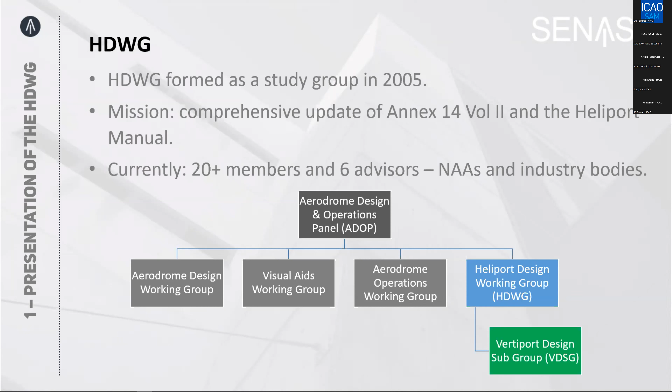How do the task forces in ICAO work within the aerodrome panel? The HDWG works based on a job card approved by the Air Navigation Commission. It was initially published on June 17, 2015, 10 years after creating the working group, and the approval of the last change was in October 2018.

That particular job card approved by the Air Navigation Commission for the work done by the HDWG is 95% complete. Since it was created in 2015, it has significantly evolved as it was further studied and improved. The evolutions have basically meant adding new work package items that were thought of, and some work packages have been delayed because of the COVID-19 pandemic, and in some cases because modifications or amendments of different annexes coincided with that timing. Whenever there's a modification in the Heliport manual, we also need to make changes to this annex.

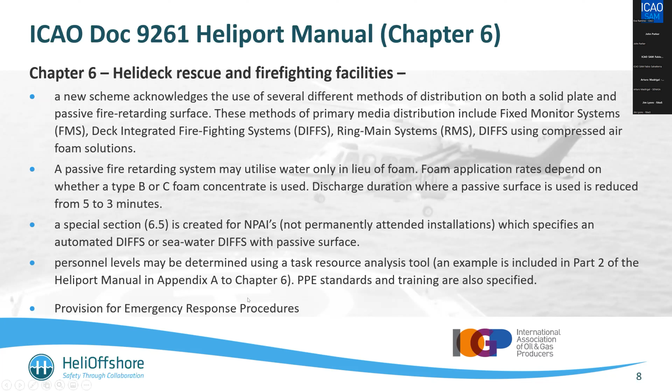Chapter 7 covers winching areas to ships, and there is guidance on the location, any physical characteristics, and specifically any obstacle protection. It includes marking of the winching area and lighting, particularly for use during night or hoist operations.

Chapter 8 covers anything in the miscellaneous bracket. This has been introduced for the first time, mainly because a lot of the larger offshore installations nowadays have criteria for parking areas and for push-in areas to allow a second helicopter to land, for example, offshore.

It also covers weather equipment and basic guidance on helideck motion and the reporting and recording of this. In addition, we include communications and navigation equipment, helicopter refueling operations, and again bird control, which, although part of the main helideck, is also a specific issue when we come to those normally unattended, unmanned installations.

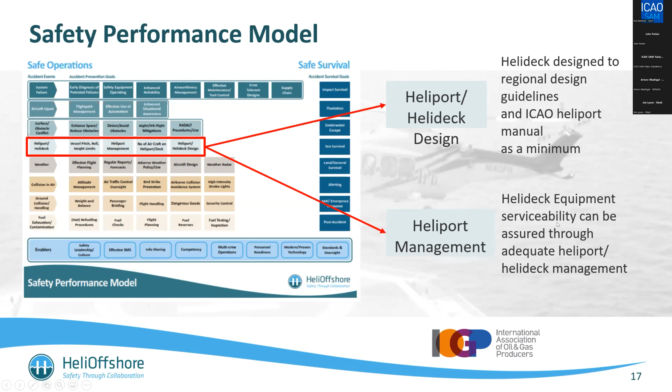This is highlighted through the Heli Offshore Safety Performance Model, which shows where we have helideck and heliport design, covering things like pitch, roll and heave for vessels, heliport management itself, the number of aircraft that can be on the helideck, etc. Really, the focus there is maintaining the original design as a minimum, making sure the helideck equipment is maintained serviceable throughout the period of its life.

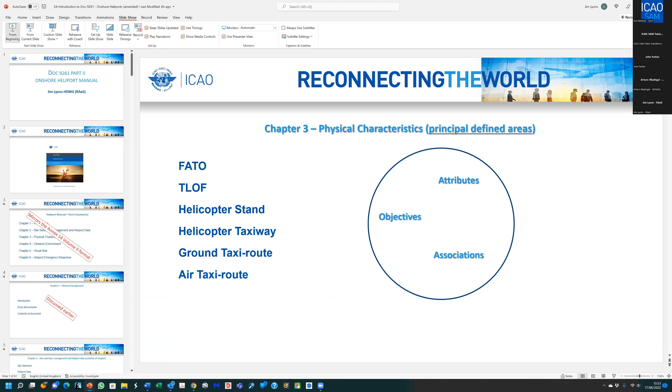For some reason or other, I can't find my presentation, even though I've got it on my screen. I might just have to share my screen. Okay. Can you see my screen? Yes, it's showing right now. Okay, but the whole, there you go. Now I see the PowerPoint. There you go, you're all set.

Okay, what I'm going to do now is I'm going to try and speak slower, otherwise I'll get a slap on the wrist from the interpreter again. What I'm trying to do is give you a quick gallop through part 2, which is the onshore heliport manual. Now you've got to understand that John represents an organization that not only owns all the helidecks but contracts all the flying to them, so it's not easy, but they've got good control of what goes on.

Now, unlike offshore, onshore heliports are not the same. There's a proliferation, there are thousands worldwide, and there is very little control. The Annex 14 provides some control, and with the certification and the SMS systems that Arturo talked about, that control will improve as well. So I don't expect anybody to remember the slides, but every slide that I have here represents something that's in the manual.

So if you open the manual, you should be reminded of what you're seeing in the presentation. It's Doc 9261, the 5th edition, part 2. The Heliport manual contents mirror exactly the contents of the Annex 14 Volume 2 format, so each chapter mirrors the chapters of the Annex. Chapter 1 we've already talked about earlier - RC and myself covered the introduction, scope, and the contents of the document.

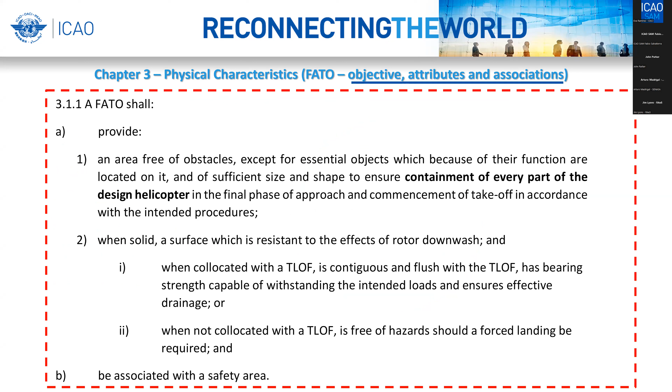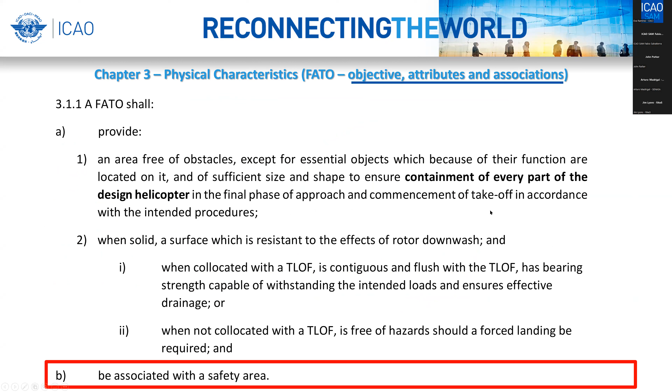So here's an example. This comes from Annex 14, Volume 2, and it's the text that contains the objective. The whole of this is the objective. Then you have the attributes - this one's containment, this one's the surface conditions. And lastly, you have the associations. Each of the defined areas will have something very similar to this inside the annex.

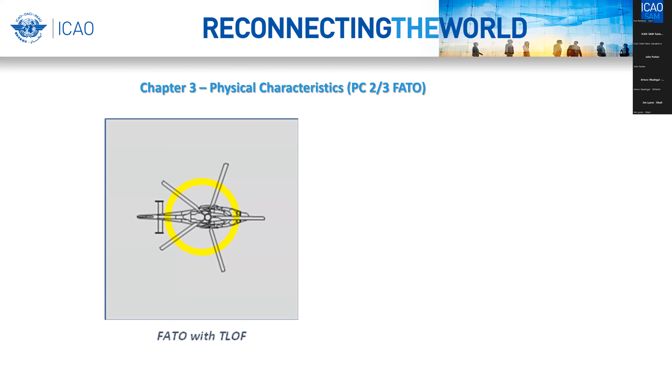So let's look at some of the things that are inside the manual. I have to say there are 150 figures in the manual and something like 20 to 30 tables, so it's a visual document. When we were producing the manual, what we tried to do is produce a pictorial description for everything we were describing in the narrative.

So here we have a FATO with a TLOF. Here we have a FATO with an aiming point. Now, I've already seen some of the other presentations, and I know that it is not a standard worldwide that the touchdown positioning circle, which is this yellow circle, part of the touchdown positioning markers, is contained on a lot of heliports. They have this triangle. In the annex and in the manual, that triangle represents an aiming point, and that FATO is not intended for landing. Only this FATO is intended for landing.

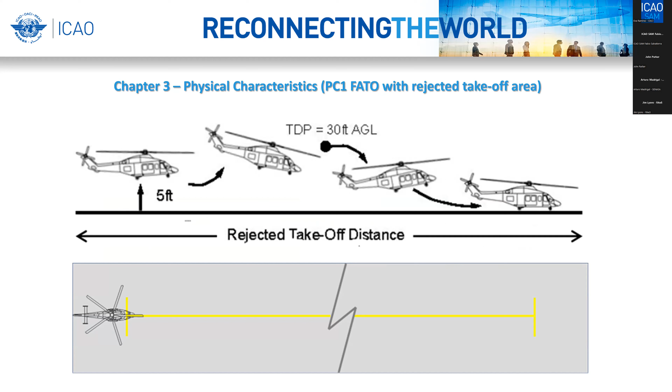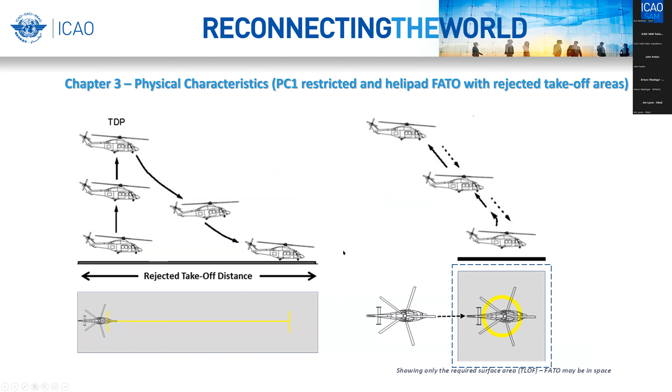The minimum FATO size is 1.5 design D, and I'll talk a little bit more about design D a little bit later. Here we have a PC1 FATO with a rejected takeoff area, and two more PC1 restricted or short field helipad. Now, with respect to this one here, the FATO does not have to have a surface. In the annex now, the FATO is an area which has an attribute of containment and doesn't necessarily have to have a surface. So if this was an elevated heliport, this dotted area would be in space.

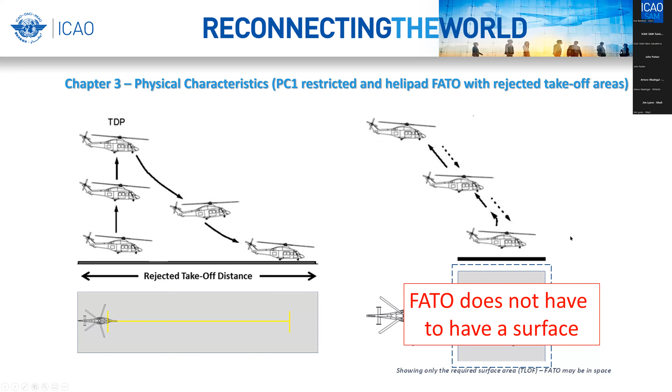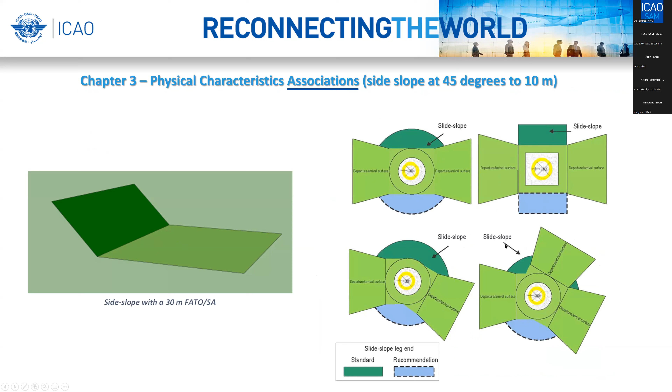Some of the associations - one of the associations is a side slope. So each heliport should have a side slope, which is at 45 degrees to 10 meters. Here inside we have pictorials of how those side slopes should appear for various configurations of heliports and their takeoff approach surfaces. The dark green is the standard and the blue is a recommendation. So it's recommended that we have them on both sides, but the standard is having them on one.

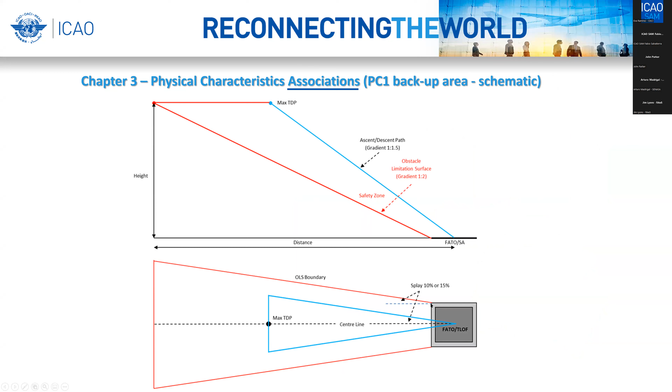Another physical association is a PC1 backup area. So if a PC1 helicopter is doing a backup procedure for a short field procedure or any vertical procedure, these are the elements that we expect to see in the backup area. It's an ascent-descent gradient. There's an obstacle limitation surface, and one emanates from the center and the other one emanates from the safety area. The 3D representation of that is as follows: the blue area is the ascent-descent surface. The helicopter goes up there and comes down there. Here we have two helicopters represented as their D values at their TDPs, and down here we have the FATO and the safety area.

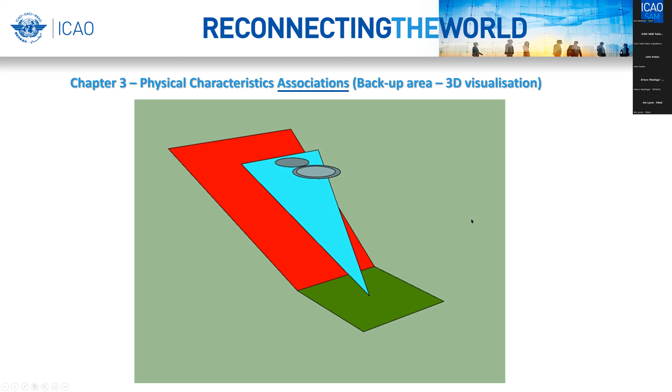Taxiways and taxi routes have attributes of containment for the wheels and surface loading. Taxi route attributes are containment, but it doesn't have a surface loading requirement. Here we have a taxiway with a ground taxi route, which is 1.5 times the largest overall width, and a taxiway, which is 2 undercarriage widths.

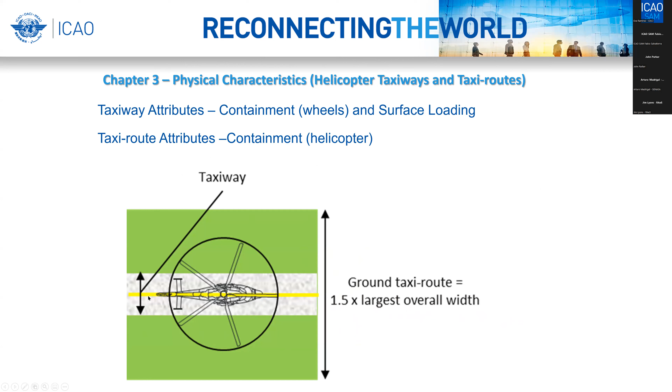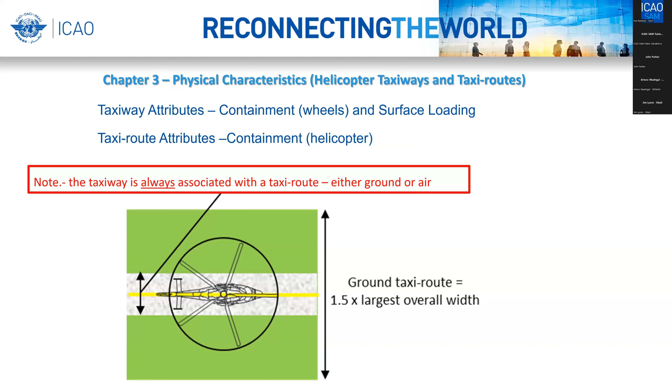The taxiway is always associated with a taxi route, either ground or air. You can't have a taxiway without a taxi route. On the other hand, you can have an air taxi route without a taxiway. So here we have an air taxi route with a taxiway, and this one you don't have a taxiway at all.

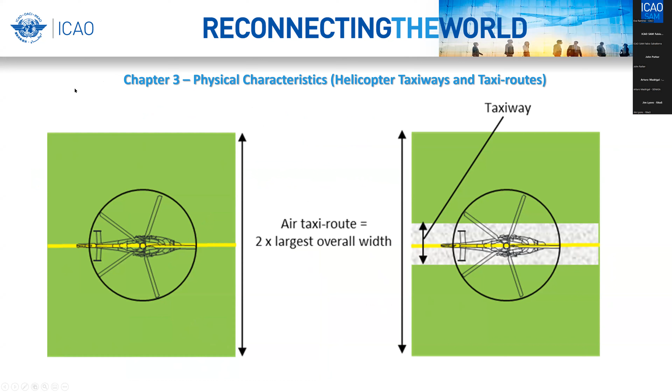Okay, so moving on to stand. The stand attribute is containment. Although there may be a surface, the surface is described in the text, and it doesn't necessarily have to have a surface area.

The stand is always associated with TLOF, which provides wheel containment and surface loading attributes. So the stand itself has containment, that's this area here, the gray area. This is the protection area. The TLOF is in the middle. This is an air taxi route, and this aircraft is taxiing in and landing on the TLOF inside the stand. And there are 3 of them there.

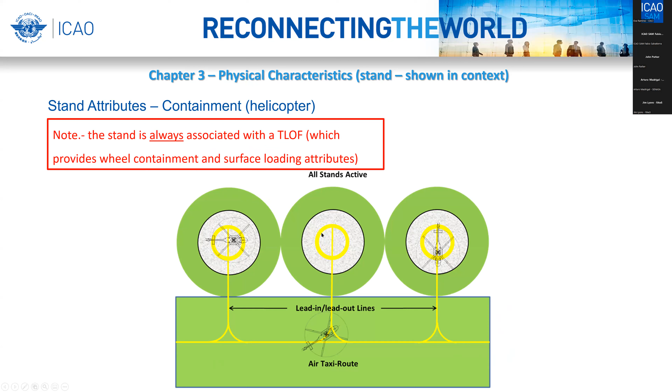Here's a more complex stand, and this is for ground taxiing. So we have the taxiway, the ground taxi route, going into a stand with an entrance at either side. The reason we have this elongated section - those of you who are pilots will know that you have to move the aircraft slightly in that direction to pull on the wheel locks. So there's always a little space required here for the wheel locks to be put on and taken off.

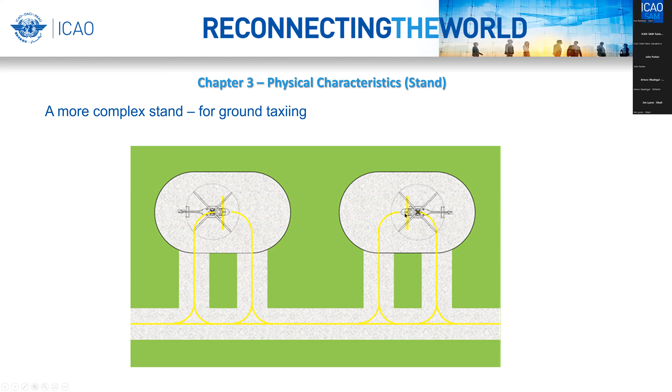In chapter 3, Appendix A, this is one of the conceptual documents that I was talking about. In order to define the critical design helicopter, the following elements have to be established.

Now, the design helicopter is a virtual helicopter containing all of the most demanding requirements from all of the helicopters. So if you've got a population of helicopters going to a heliport, each of them will have different attributes. The worst attributes of all will be contained in the design helicopter. And that design helicopter then provides the limitations that are contained on the heliport.

So the first 2 basic ones: the maximum takeoff mass, or the weight, and the largest dimension of the helicopter with the rotors turning. These are 2 that are marked on the heliport, and when they're marked there, they're indicating that that is the maximum size and the maximum mass that that can take.

The rest of them - the largest width, the largest undercarriage width, the largest containment area, the largest distance between the rotor centroid and the midpoint, the dimensions for the hover, and if applicable ground turning, the wheel skid loading to establish the surface loading requirements, the fuselage length and width for the RFFS calculations, and the critical obstacle avoidance criteria for the obstacle limitation surfaces - all have to be contained in the design helicopter.

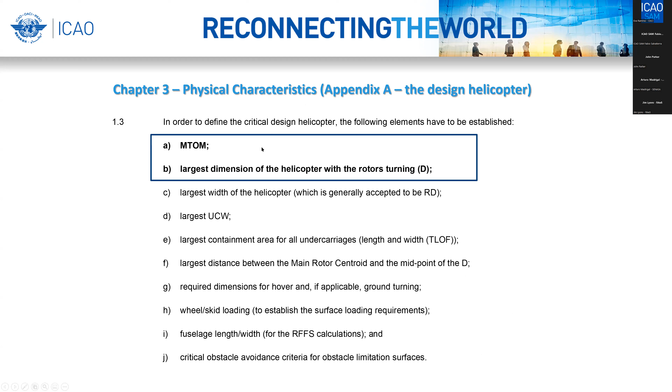Once that is established, the designer then gets on and designs a heliport. All of these should be defined before the designer moves to the detailed design. I'd like to just cover 2 of these elements that are discussed in the paper. And the paper is a conceptual paper, so we'll discuss each of these in the concept of the heliport.

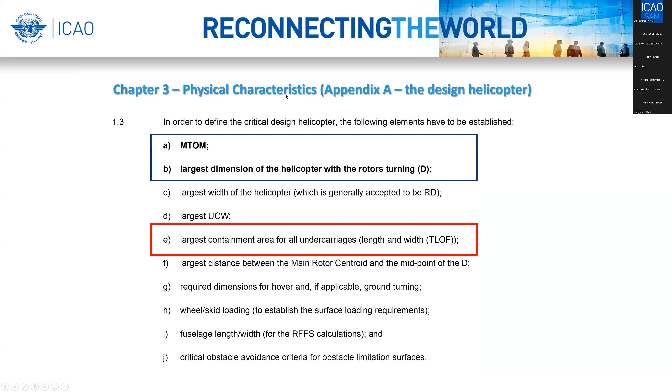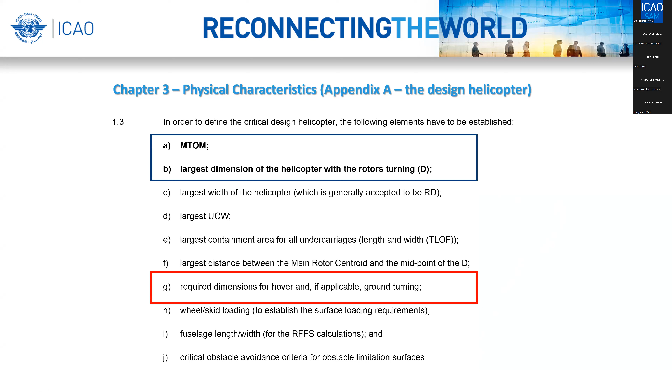So if you go to the manual and pick up Appendix A to Chapter 3, you'll find there is a whole conceptual paper which talks about all of these. So I briefly want to cover the largest containment area for all undercarriages and the required dimensions for hover and, if applicable, ground turning.

First of all, I just want to briefly discuss how we arrive at the minimum dimensions of a TLOF. So if you look at this aircraft here, we have a 76 and a 139. One of the things we have to do is establish the total width required for that aircraft to be situated on a heliport in any direction. So in fact this is a circle, but represented as a line, and we have 2 directions rather than 360.

So the 76 is one of the most demanding aircraft. It has a long base here that is required. Now, an aircraft can only be accurately placed on that if the pilot sits on the touchdown positioning marker. Now, because the pilot is, in theory, 0.25 back from the front or 0.75 from the back, that's how the touchdown positioning marker works.

If in fact he's not 0.25 back, there's an error, and that error is accounted for in the TLOF minimum size.

The other error is that the pilot in setting down is always going to make errors of positioning, particularly with a circle. It's extremely difficult. I have a large number of hours offshore, always flying to the circle, and I can tell you, it's very difficult to put your bum on the touchdown positioning marker. So there will always be errors of positioning.

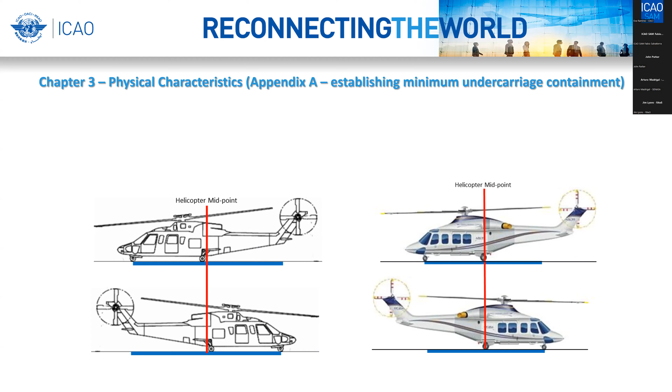Now for the turning, I'll leave the turning in the hover, because that's one issue, and just address the turning on the ground, which is also discussed in the appendix. If you have a radius of turn of 0.25D, you require a circle of 1.25D, and that's a very, very tight turning circle. If you have a radius of turn of 0.5D, you require a 1.5D circle. But in practice, most wheeled helicopters have a minimum radius of turn established by the manufacturer, which should be used in the design process. In the absence of data, the minimum radius of turn should be 0.5D.

Moving on to Appendix B and surface loading. Now, surface loading is addressed in two areas: static, which means the helicopter has no motion, it's at rest or quiescent, and that is static loading; or dynamic loading, which relates to energy or objects in motion.

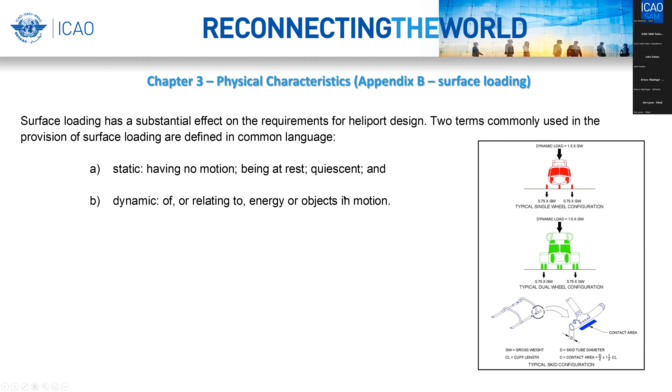Now, the appendix discusses all of these issues with respect to certification, non-normal landings, emergency landings, and so on. It's all discussed, and it comes up with a series of recommendations. It also contains the FAA guidance, which is rather more simplistic, and which gives two figures, one for static and one for dynamic. I have to say that for an elevated heliport, the same as an elevated helideck, there are a number of calculations required to establish the dynamic loading, and all of that discussion is contained in Appendix B.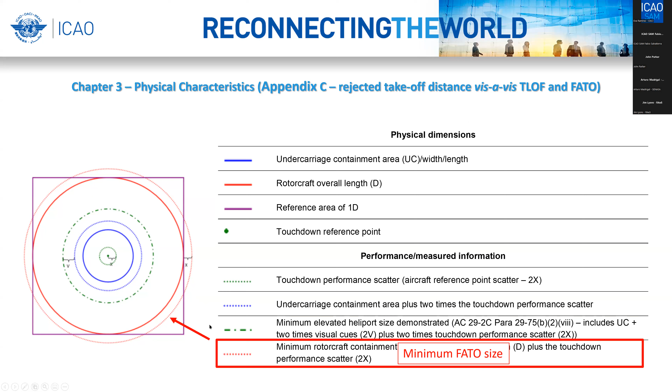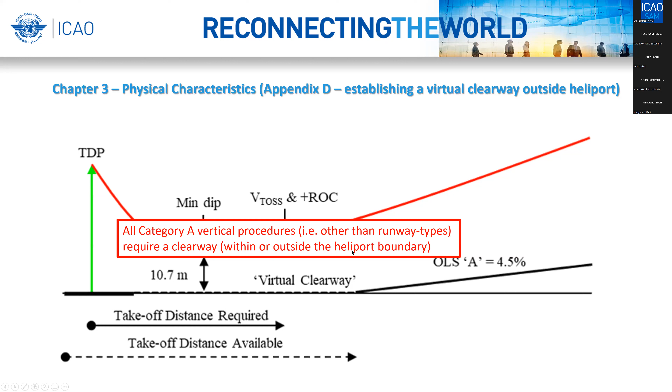Appendix D is another appendix in Chapter 3, which establishes the virtual clearway outside a heliport. Now, we looked at the backup procedure, and the backup procedure for performance class 1, a category A procedure — all category A vertical procedures other than runway type, so that's short field, restricted area, vertical or backup — require a clearway. It's either within or outside the heliport boundary. This is an example of one that's either inside or outside the boundary. If it's outside the boundary, it's virtual. If it's inside, it's part of the defined area. And from that you establish the min dip of the procedure, which is the lowest point the helicopter reaches if it loses an engine, and the takeoff distance required, which is the VTOSS and a rate of climb.

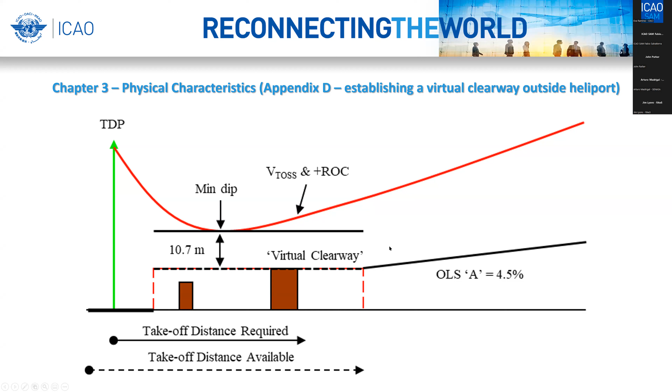This is appended with the obstacle limitation surface, the takeoff climb surface, which is at 4.5%. You have exactly the same thing if there are obstacles — you establish a virtual clearway above the obstacles. Those of you who fly and look at flight manuals will recognize this picture, but may not recognize the clearway that's required here. Once again, the aircraft dips down, keeping 35 feet, 10.7 meters, between the aircraft and the obstacles, moves up to the takeoff distance required, and then the OLS kicks in. So the aircraft is always 35 feet above the OLS when it reaches the initiation point, the origin. And here's another one showing an elevated heliport with the virtual clearway above all obstacles and all the other elements inscribed there.

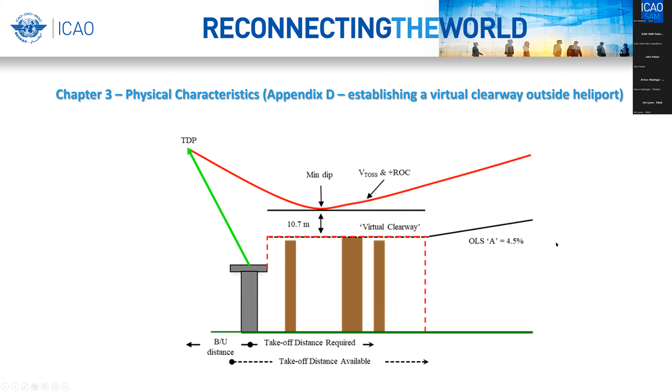Here's a 3D representation without the obstacles. Once again, with the ascent descent surface, the obstacle limitation surface, the FATO safety area, the helicopters in their TDPs, the clearway, and the obstacle limitation surface, the departure surface. And the aircraft dips down along the clearway and then starts its climb at this surface here. Now that may look a long surface to you, but I can assure you that these aircraft do take a while to reach the min dip.

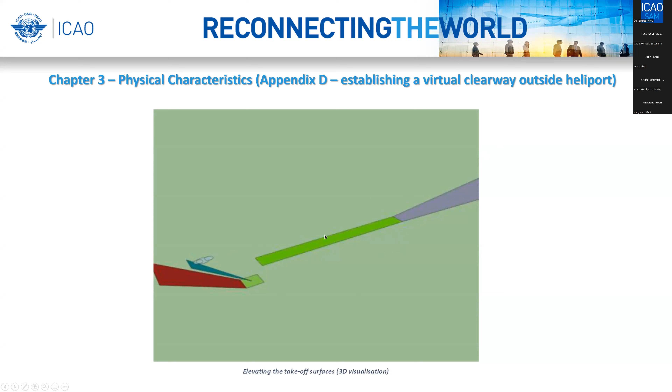And we have another appendix, Appendix E, which is not yet in part 2, the onshore manual, but will be. It's already been passed through the HDWG and will be incorporated in the next revision. This mainly addresses rotorcraft downwash and outwash.

And because recently we've had a number of incidents and accidents, we now require to put something in the heliport manual. So if we look at another pictorial, and this one's closer to the ground, it becomes even more complex because these vortices start pairing. And this whole area here becomes complex when it gets closer to the ground.

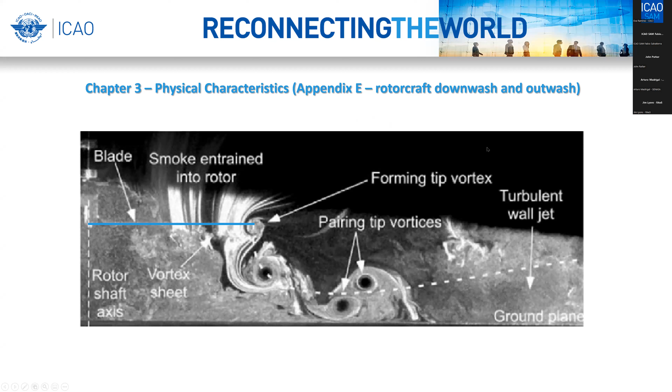So in pictorial terms, here's an aircraft that's hovering. It's hovering up here. It's requiring a force to hover. That force produces a velocity through the disc. And because the surface narrows here, the preservation of energy means that speed there goes to 2 VI. So you have a velocity of airflow, an induced velocity, and at this point here, within 3 diameters of this point, you get a 2 VI, which is 2 induced velocity.

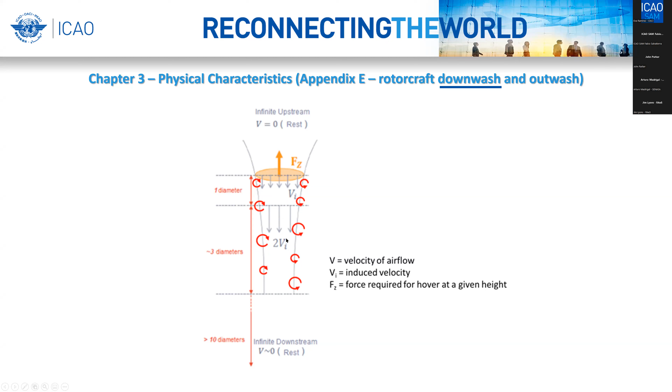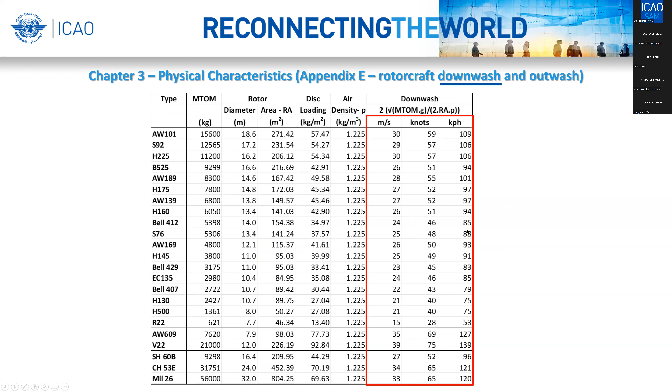And this is represented in the manual in tabular form. Inside here, you've got the critical areas, which are the mass, rotor diameter, rotor area, disc loading, air density, and it produces a table of speeds. And if you take, for example, a V-22, the Osprey, 2VI is 75 knots. For an S76, it's 48 knots or 88 kilometers, or 25 meters per second.

But we're also interested in this outwash area here. And because the air squeezes down as it interacts with the ground, there's a narrowing here. And once again, conservation of energy means that at this point, you're likely to see 3 induced velocities. And you're also likely to see a confused area where the vortices start to interfere with this here. So it's not a laminar flow as is sometimes depicted. It is a very confused area.

And so what we've done is we've used the FAA model called the ROTWASH model, which is based on a whole bunch of trials done in the US a number of years ago and has been validated by aircraft trials. Inside the manual is a table, and it gives you a radius at where these speeds reach. This radius is here and meters here. So this is 20 meters per second, 15 meters per second, and 10 meters per second. And these are the safe range, the safe range at which the boundary should be situated.

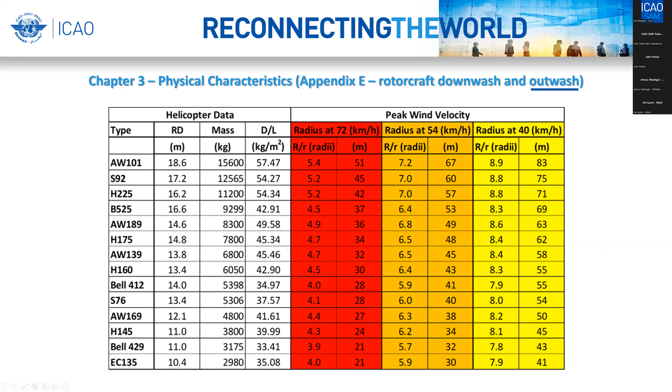And so this leads to a condition where you can establish a boundary at a ground level heliport that is safe from outwash. And bearing in mind that a lot of these heliports now are hospitals, and they're close to the areas where the aged and the infirm move towards the hospital, it is a requirement. And there have been some deaths recently caused by the outwash.

Okay, that concludes the characteristics. Moving on to the obstacle environment. The obstacle limitation surfaces and sectors deals with the approach surface, the transitional surface, the takeoff surface, and inside the manual, surface with and without PinS, which has been put in for information. And there's also an appendix at the end dealing with elevating the origin of takeoff and approach surfaces and utilizing PC1 vertical procedures.

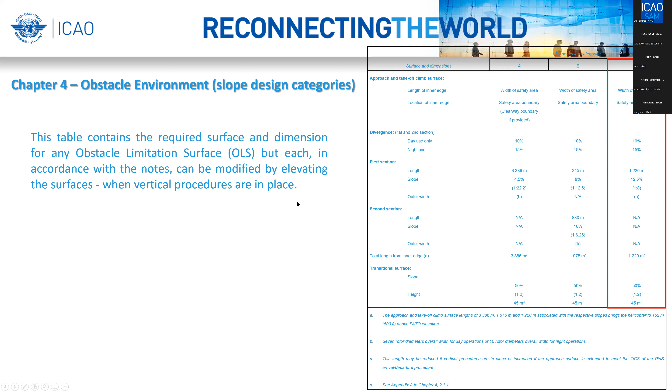Inside the manual, there's a table that contains the required surfaces and dimensions for any obstacle limitation surface, but each, in accordance with the notes, can be modified by elevating the surfaces when vertical procedures are in place. So we have 3 types: type A, type B, and type C. The specific case of elevating the clearway OLS and protection surfaces is addressed in Appendix A, but is discussed in some of these notes that are in the table.

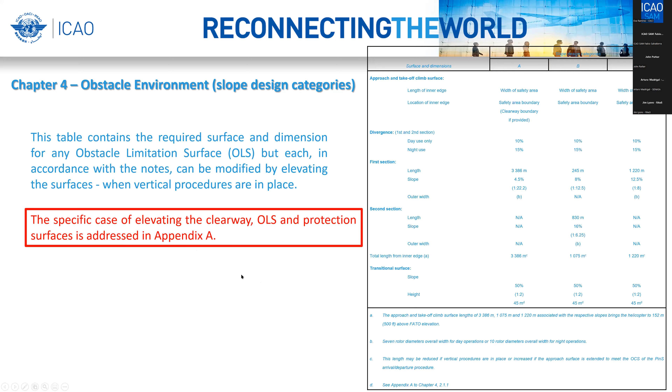Also in the manual, we discuss the transitional surface, and there's a discourse on the transitional surface. This shows it, and it's used mainly for limited visibility procedures, so that when an aircraft's coming in, if you get temporarily displaced because the visibility is low, it's protected from the obstacle.

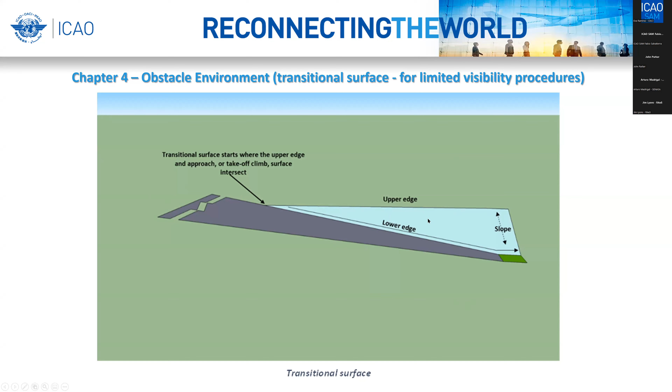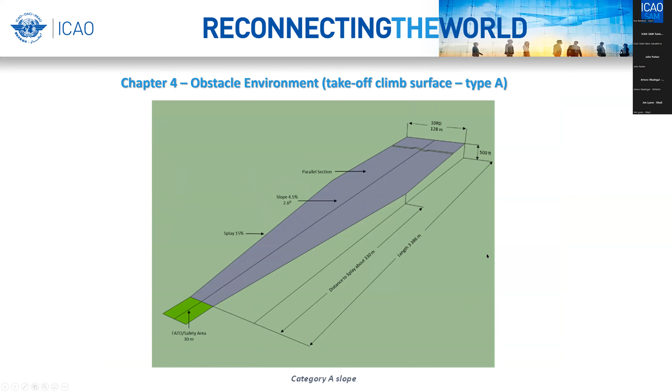Then we have a takeoff climb surface, and this is a type A. The type A surface is a 4.5% surface - that's a 2.6 degree obstacle limitation surface. You have the same dimensions here that are discussed in the manual. But importantly, it's not possible to have a performance class 1 procedure without a clearway.

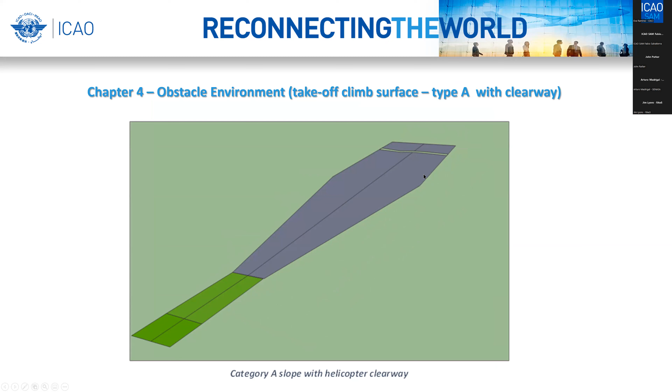The normal presentation would be for there to be a clearway, whether elevated or ground level, and the OLS appended to that clearway just here. A type B surface, which has got a lower gradient than the 12.5, and then a steeper gradient here. This area is meant to accommodate for singles or twins without very much performance to get to their climb speed before they hit this gradient here.

There's a takeoff climb surface for type C, which we've seen on the approach surface. It's an identical surface.

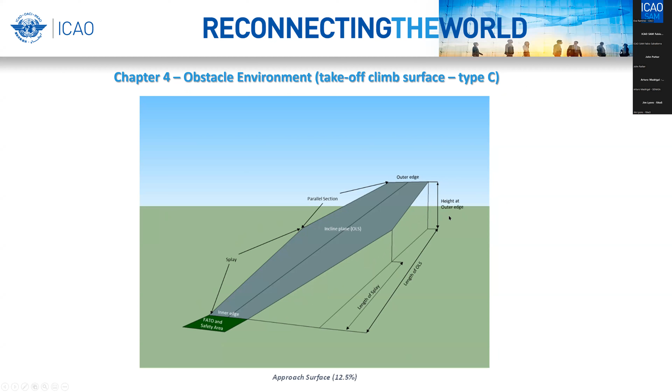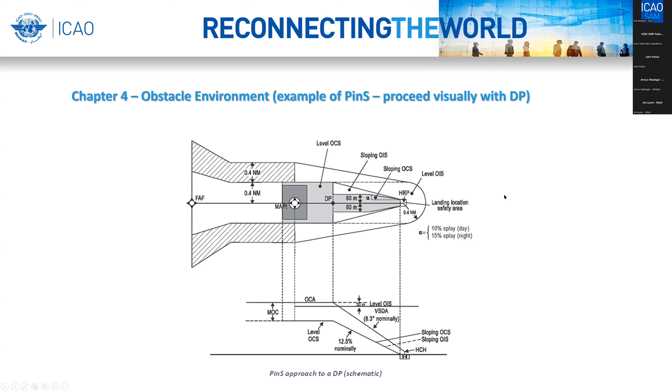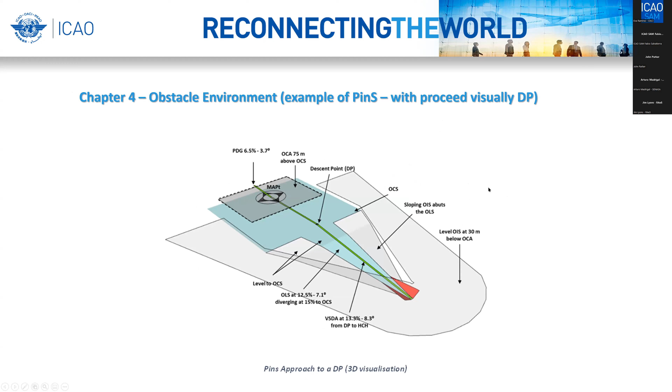Chapter 4 also has inside a discussion of PinS procedures and proceeding visually with a DP. A DP means that when you get to the missed approach procedure, you proceed horizontally to the descent point, and then you proceed visually to the heliport. To make this easier to understand, we put a 3D depiction in the heliport manual, so you can correlate one with the other and see exactly what it looks like when you see these surfaces. We also have one without the DP, where you reach the missed approach point and then proceed visually, and a 3D depiction of that as well.

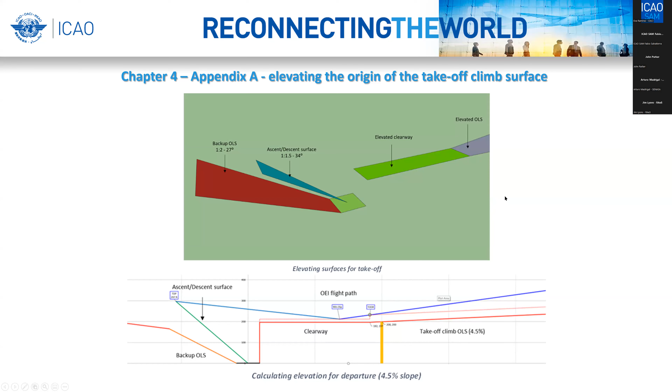With departure, the same - you arrive in here and you depart down this surface, and the designer probably has a tool like this to work out the 4.5% surface with the obstacle limitation surface, the backup surface, and the ascent-descent surface. So the approach is here to this surface and then down.

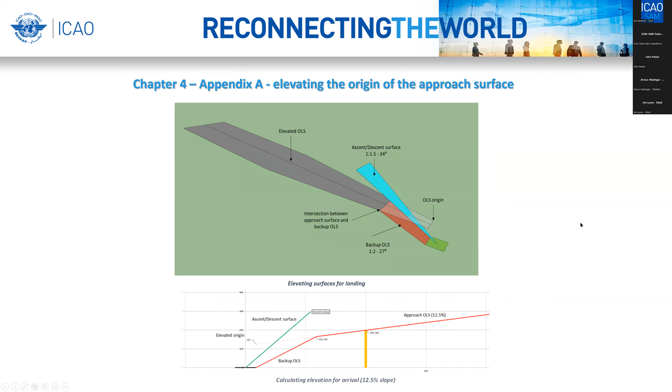Also inside the appendix, we have transitional surfaces that protect the helicopter for those helicopters that have a lateral element in their backup, or they have a sideways movement. These transitional surfaces are an extension of the protection surface we saw as an association in chapter 3. So the side slope protection is extended up into this transitional surface. The clearway is widened and then is appended to the takeoff here, and so on. This is the most complex of the drawings that's in there, because it deals with both the approach and the departure, and it's all in Appendix A.

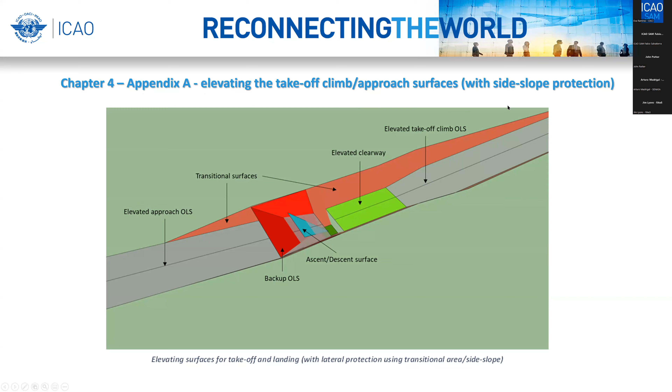Moving on to chapter 5, the visual aids. It deals with indicators, marking aids, lights, and there are 3 appendices which are basically methods of compliance. So indicators are these here, and onto the marking aids.

Here we have a marking aid for a TLOF. We have the perimeter markings, the heliport identification marking, the maximum allowable mass marking, and the D-value marking. The D-value marking, this marking here, defines the D-value or limiting size, not the TLOF or FATO dimensions. So this is not the size of either the TLOF or the FATO, it is the D-value.

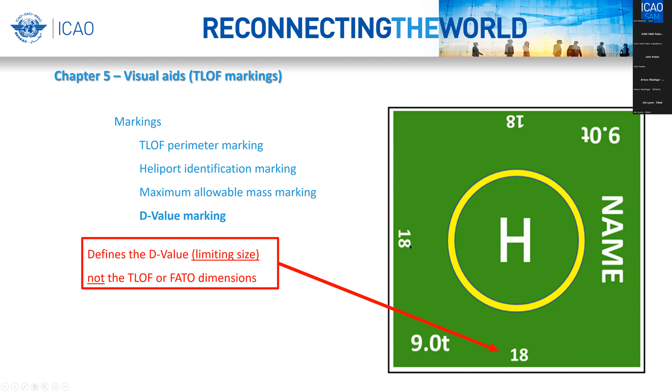So the pilot knows that if his D is within the 18 meters, then he's clear to land at that heliport. Here we have some markers and lights for runway type, and the visual aids for aiming point with the FATO marking, the aiming point marking, the identification marking, the mass, and the D value again.

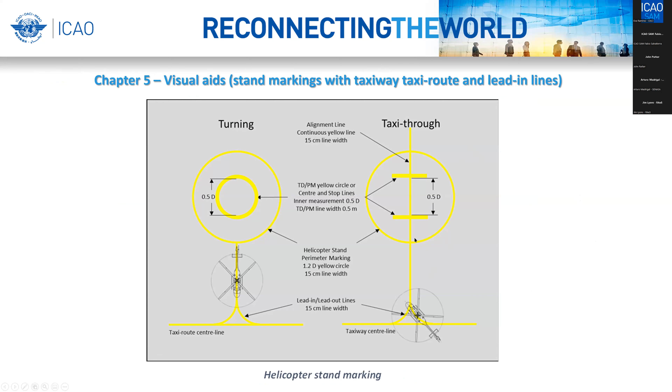Here we have visual aids for stand markings with the taxi route and lead-in lines, comprehensively marked. For visual aids, we have pictures of all the lights, including the touchdown position marking lights, FATO lights, and green FATO lights. The difference is that in the manual, we recommend that where the FATO doesn't have load bearing, the lights should be white, and where it does have load bearing, the lights should be green. That's a philosophy we follow throughout the lighting system.

Here we have the lights white this time because this is an aiming point and not a landing point, so it's a FATO with aiming point lighting. And here we have 3 examples of take-off lighting: one with comprehensive lighting of the identification, touchdown positioning, and take-off lighting; this one with lighting elements; and this one is a full heliport with the heliport identification marking, the cross, the touchdown positioning marking, and the take-off markings.

Briefly, chapter 6 is the heliport emergency response chapter, and this is a comprehensive chapter. We haven't got time to cover it now, but it consists of 2 parts: heliport emergency planning, a general part with the contents of the plan, and rescue and firefighting service, which talks about the required level of RFS, staffing levels, level and method of protection, response time objectives, rescue arrangements, comms alerting system, RFS personnel, and means of escape.

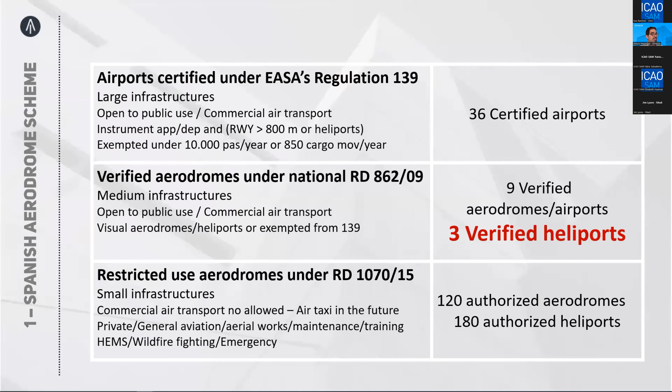Very well. In Spain, just to explain it in simple terms, we have large airports, medium-sized airports and heliports, and small heliports.

So we have the large airports, the large infrastructures, which are certified under EASA's regulation, under regulation 139. We have a total of 36 large certified airports in Spain and its islands. These airports are the large airports open for public use, for commercial air transport, and they are under EASA's regulation because they have instrumental approaches and departures, and they are open to public use, and they also have commercial air transport.

So there we do not have our certified heliports. There are 36 certified airports, but there are no certified heliports.

On the side of small infrastructures, we call them also of restricted use. They are regulated under the Royal Decree 1070. These are small infrastructures where currently no commercial air transport is allowed, and they provide private general aviation, aerial works, maintenance, training, HEMS, wildfire fighting, emergency, medical issues, etc.

Then we have a number of aerodromes, medium-sized aerodromes and heliports, which are open to public use and where commercial air transport is provided, but since they are smaller than the large ones, they are exempt from meeting the European regulation, either because they do not have instrument approaches or departures, or because they have under 10,000 passengers per year.

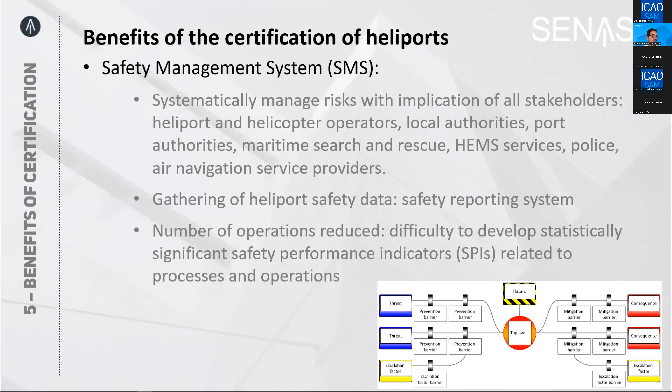However, over time, the Spanish heliports have been able to obtain some indicators that allow us to look at the status of operations. But the most important part of this SMS is not so much the possibility of providing safety performance indicators, as well as the possibility of systematically managing the risks and gathering the best safety information possible.

How can we improve the certification of heliports in Spain? Where are we heading in the future with the certification of heliports? And what can help us with the certification of ICAO?

Well, the heliports tend to be sites. They are not like the large airports. These are rather small sites, facilities. In Spain, for instance, in Ceuta and Algeciras, there's one single commercial operator, which is Hélity. These are organizations, small organizations. They are not complex organizations.

So how can a small and non-complex organization benefit from this? It can benefit from a heliport manual and an SMS, which are very simple, that will not impose an excessive work burden or red tape, and will help them have their procedures better organized in a very simple manner, and providing...

Information about difficult operations. So one of the issues that needs to be addressed in Spain, and we will address it with our legislative change, is the simplification and improvement of heliport manuals so they can become straightforward tools.

The evolution of the SMS: all the pieces of an SMS are operational at the Spanish heliports, and what we need to do in the future is to move from a state where they are operative to a state in which they are as efficient as possible with the minimum level of effort possible.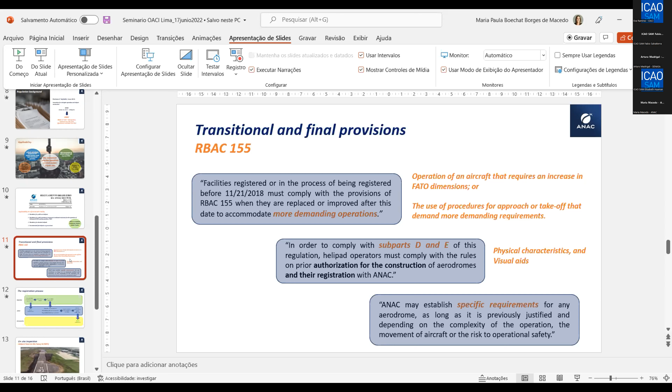Just to talk about the registration process, which I mentioned before, this is the verification we do here in ANAC before registering the helipads or heliports. The first step is that the operator requests ANAC authorization for construction. We then issue this authorization. The operator then builds the heliport or helipad and requests ANAC for registration.

When he asks for registration, we examine some documents, and if it is a public use heliport, we will do an on-site inspection based on RBAC 155 requirements. If it is an elevated helipad, we will do a remote inspection, also based on the requirements of the regulation. And if it is an on-ground helipad, for which the regulation is not mandatory, only recommended, we will do a basic evaluation based on some information the operator provides in the file he needs to fill in.

After this verification, we register the heliport or helipad, then we open it to air traffic, and we request aeronautics to update publications. Aeronautics then update the publications, and the process is concluded.

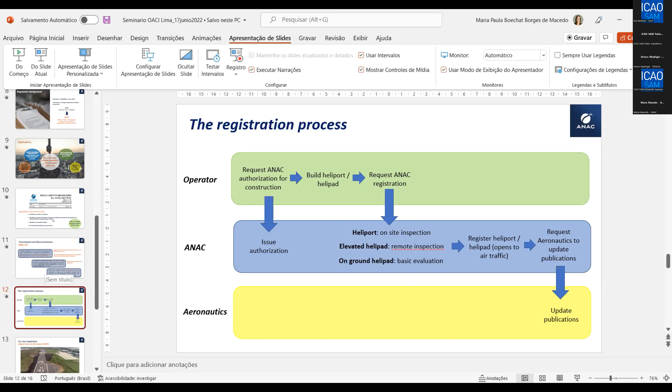Here is a picture of the heliport Farol de São Tomé, located in Rio. This is the heliport we have, the only one, as I mentioned before. For this heliport, we did an on-site inspection. It was the only on-site inspection we did so far using RBAC 155. This is a heliport that serves mainly offshore operations.

For elevated helipad, as I mentioned, we do a remote inspection. It's not an on-site inspection. We do a remote inspection based on a checklist.

Here, I hope you can see it well because it's not on presentation mode, but this is a checklist we send to the operator. We list here all the requirements from RBAC 155, and we list on the third column the form of proof of compliance.

So we say here to the operator which evidence he needs to send us in order to prove that he's compliant with the requirement. It can be a blueprint of the heliport, pictures, videos, or for some requirements, a declaration signed by the responsible engineer is acceptable. So we have the form of proof of compliance for each requirement listed on that document, and the operator needs to fill in this document and send the evidence for our analysis.

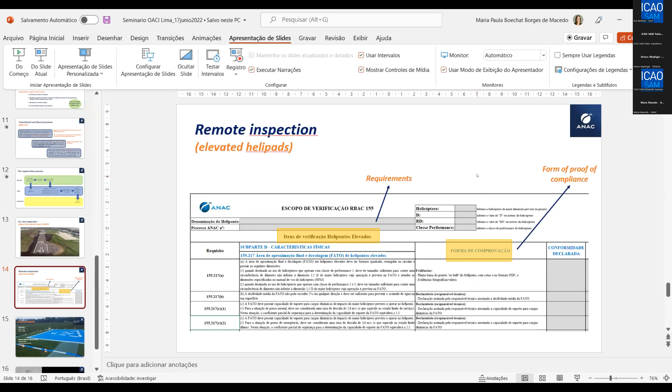When it comes to on-ground helipads, the requirements of the regulation are not mandatory. As I said, they are just a recommendation. So we do a basic evaluation just on the dimensions of FATO and the safety area that he declares, just to see if there's nothing severely out of standard, making sure the dimensions declared are okay with the regulation. And if he's willing to operate at night, we check if he has the FATO lights and the illuminated windsock.

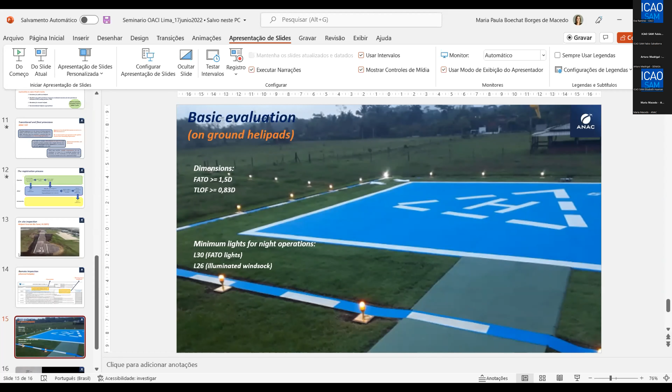So that's it. I hope you guys could see it well, because I don't know what happened here. I could not do the presentation mode, but that's my presentation. Thank you very much.

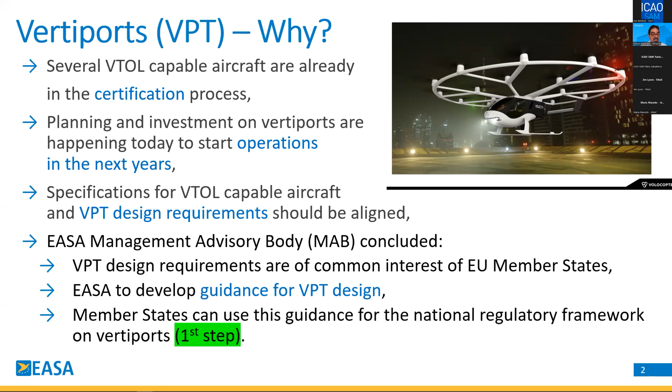Now, of course, in the future, this guidance prototype of technical specifications will be evolving towards a full EASA regulation that will include technical standards and regulations for vertiports. EASA is expected to complete that by 2025.

So let's see. In view of all this, EASA created a vertiport task force with some 48 members, including VTOL aircraft manufacturers, EASA experts, civil aviation experts, and even airdromes. A very important mixed force to develop this prototype of technical specifications.

What have we done? We've prepared these technical specifications starting from scratch. Is that the case, or where have we been based on? Well, helicopters, remember, are also aircraft. So what EASA has basically done is to take Annex 14 and use it as guidance material to develop a prototype specifications document for vertiports. Since there was no detailed information about this issue, we've had the participation of VTOL manufacturers that have contributed to the development of these standards based on the data they had.

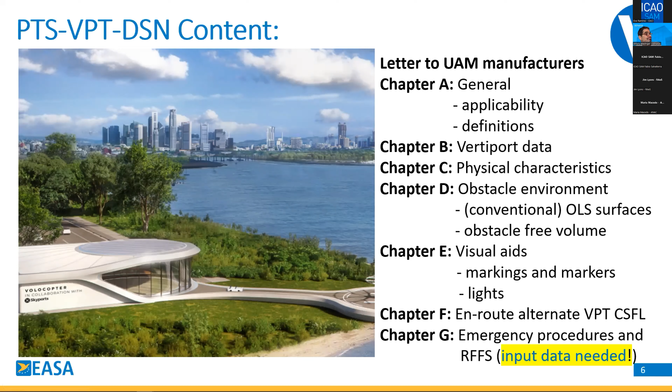Chapter D is on obstacle environment, where they take into account some surfaces similar to heliports, providing a new form of limiting obstacles through a simplified volume of space, which we will look at later on. They have designed specific visual aids for these facilities, especially markings and markers. They have regulated on en route alternate vertiports, but we haven't been able to regulate on RFFS services because EASA didn't have any data on fires from lithium-ion batteries, which are critical for this type of aircraft. For this, EASA needs the assistance of the industry so they can regulate this in the future.

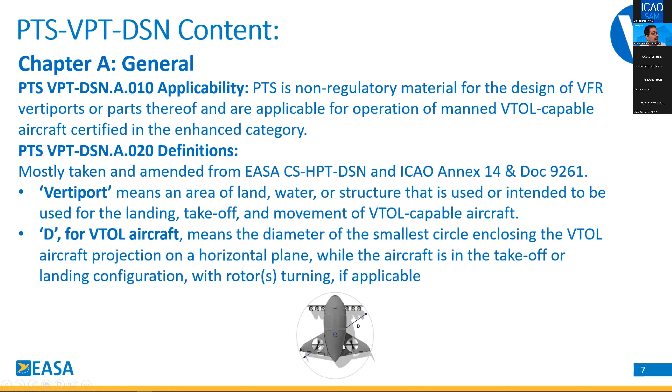As to the vertiport data in chapter B, what we have done is transfer what ICAO requires in volume 2 for helicopters, and shifted that set of data to be provided for the vertiports, including coordination with the air navigation services and the AIS, the Aeronautical Information Service.

As to the physical characteristics chapter, the principle we followed for its development is the same principle as Annex 14: that vertiports will be designed so as to have no more than one VTOL capable aircraft in the FATO at the same time. We have followed the principle of building blocks that Annex 14 provides for, and included our requirement.

There was a significant concern on the side of the manufacturers that reduced spaces where these operations take place could allow for almost simultaneous operations very close in space between these aircraft. So in the chapter on physical characteristics, whenever they want to set FATOs which are close by, we need to see to what extent they can have simultaneous operations, or whether the FATOs are too close in distance to carry out simultaneous operations. All of this is based on the D value.

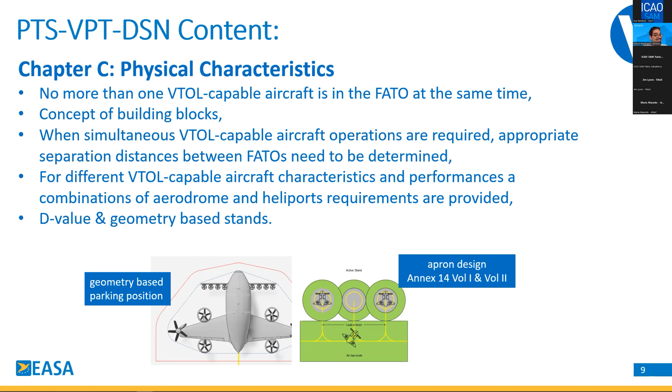Another piece of news on physical characteristics: helicopters have a design of stands with a large area of protection, due to the protection required by the rotors. But vertical takeoff aircraft will have the rotors scattered in several sites, often enclosed or encapsulated, and they do not present the same level of hazard as a helicopter rotor. So stands have been designed with the shape of an envelope, requiring less space in the apron for parking this aircraft. This is one piece of news in chapter C on physical characteristics.

As to the obstacle environment in chapter D, we have done a couple of things. On one hand, we have maintained the obstacle limitation surfaces found in Annex 14 and the Heliport manual. We thought there could be VTOL aircraft operating similarly to helicopters, so we maintained the same set of conventional surfaces as for helicopters.

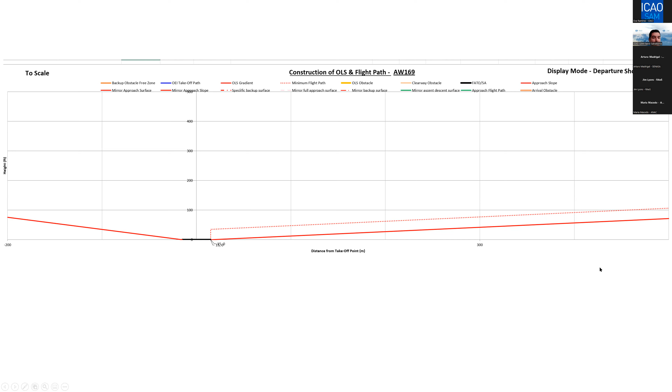Now, if I just go back and show you, this is where the surfaces are on the right-hand side. This is where the OLS is, and this is the 35 feet. Now, if I put the aircraft path in, this doesn't change.

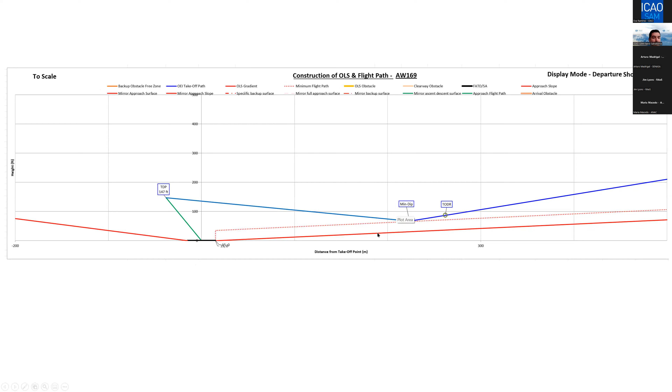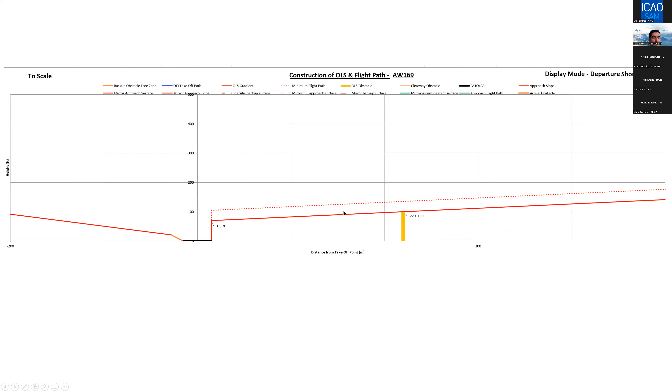If I put the aircraft path with a clearway in, it still doesn't change. So what you have here is a procedure that costs nothing to operations, because the TDP is, in this case, 5 feet more than it would be if you were trying to do this complicated mathematical sum. So we do the mathematical sums, we provide the clearway, and all the pilot has to do is know what this level surface is, he can do his calculations, drop down and so on, and work out exactly what his TDP has to be. That works exactly the same if there's an obstacle there. The surface has to be elevated to clear that obstacle. You still have the same geometry. If you fly to it, you still have this complicated sum of working out the min dip and the takeoff distance required. And if you look at these two surfaces, if I put a clearway in, those two surfaces, if they change, they get lower. So it's not a big deal. That's why you have a clearway, because it costs nothing, but it simplifies the calculation for any pilot who has to work out his performance for the takeoff.

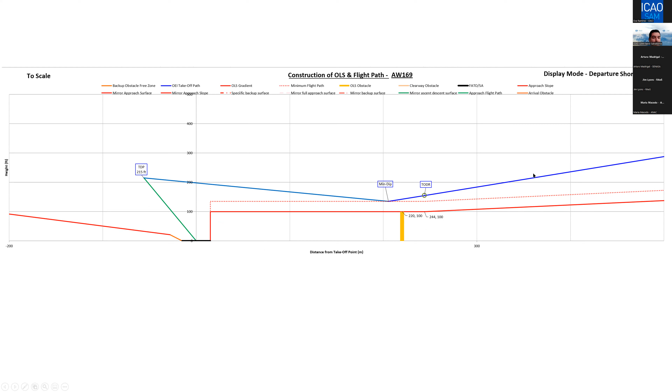Is that understandable?

I think it is really, well, I'm not an expert on this, and I got it. So,